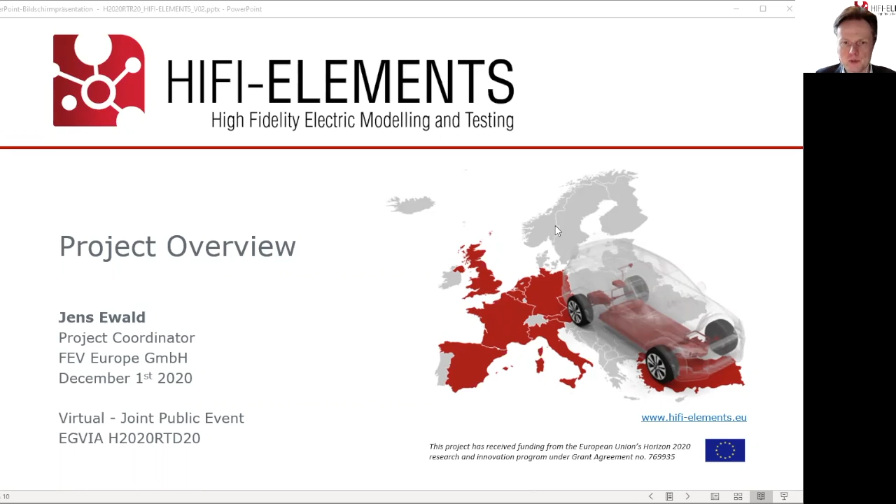So HiFi Elements is to improve the battery electric vehicle workflow with its results. It's an EU-funded project with 16 partners in the LC-GV-07 2017 call. It started in October 2017 and runs until the end of this year. So we have partners from all over across Europe. As you can see, we have engineering services providers. We have tier 1 suppliers.

We have research institutions from academia, as well as OEMs, mainly here Ford, Iveco, and Jeep, who are complementing our project here from the OEM side. Our work scope means that we want to develop effort-saving automation methods for calibration and testing and increase the test coverage for battery electric vehicles with our developments.

And main topic is the simulation of the whole battery electric vehicle, for which we are proposing a standard for the simulation system architecture. And when you subdivide this architecture into components, we also standardize what we understand under such a component, and we define the interfaces between the components. Those component models, according to the standard, are being also implemented and developed in HiFi Elements. And then also we have developed a toolchain for data management and co-simulation.

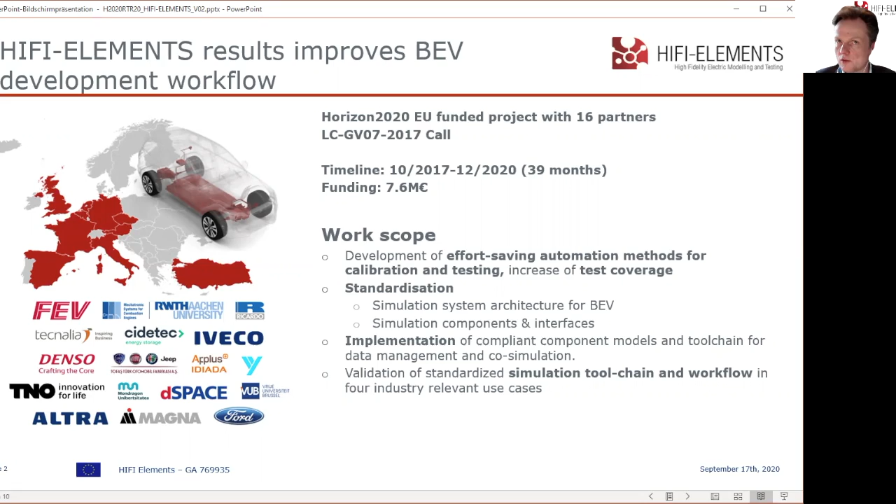At the end, then, we have validated the standardized simulation toolchain on the workflow using industrial relevant use cases. So this is the basic idea of where we stand from HiFi Elements. I showed this already last year on the EGVIA meeting, so just quickly going through this. We have several phases in the development project, going from a concept phase to detailing phase, and later to MiL, SiL, and hardware in the loop, and finally test bench.

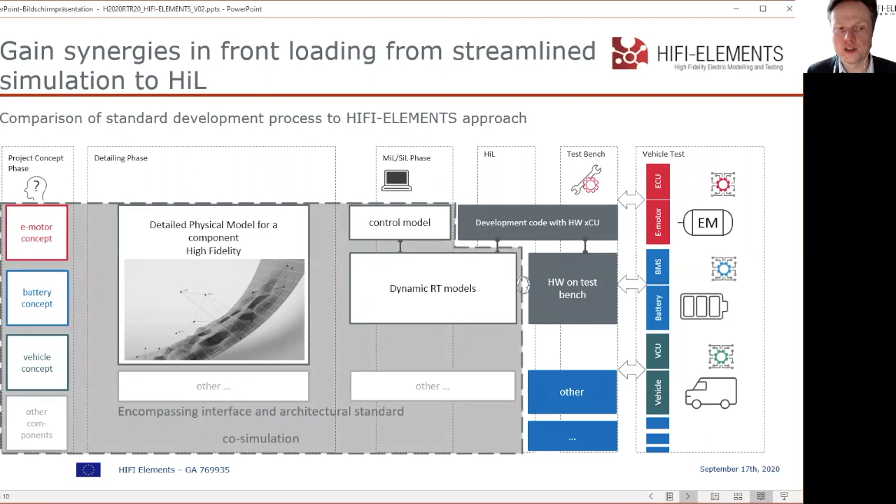And with the state-of-the-art workflow, we have discontinuities in which we cannot really further develop because we are missing an overall standard where simulation codes can be then exchanged, and that means that teams cannot really efficiently work together. So we have decided that we want to define this encompassing interface and architectural standard in order to overcome these problems. We are using public standards like FMU, FMI for this, and we are also using tools like co-simulation in order to do so.

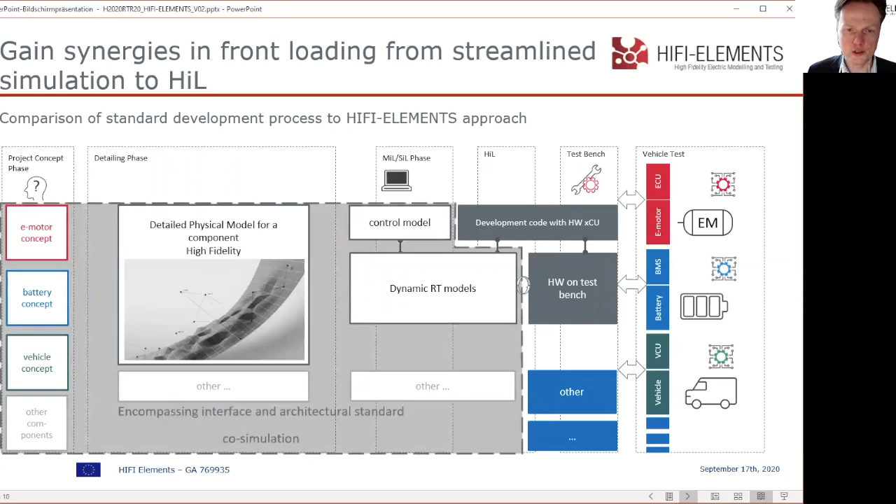So by means of this, we already have fulfilled our first objective by defining architectural simulation standards and its physical partition. So usually when you do such a BEV simulation or a MiL and HiL and use simulation tools, for example, each of the simulation tools, which might be commercial, like KULI, GT Drive, or whatever, they are looking at a specific physical discipline, either the thermal discipline like KULI, or the mechanical or electrical discipline. But that would be across the components.

So that means that the simulation tool would then, in the state-of-the-art approach, take care of many components at the same time. And one of the components is always represented by different simulation tools. Here in HiFi Elements, we want to improve exchangeability. And therefore, we have said we put together the component into one model and put also the controls to it. And that would cover all the physical disciplines, which means that we have to have co-simulation.

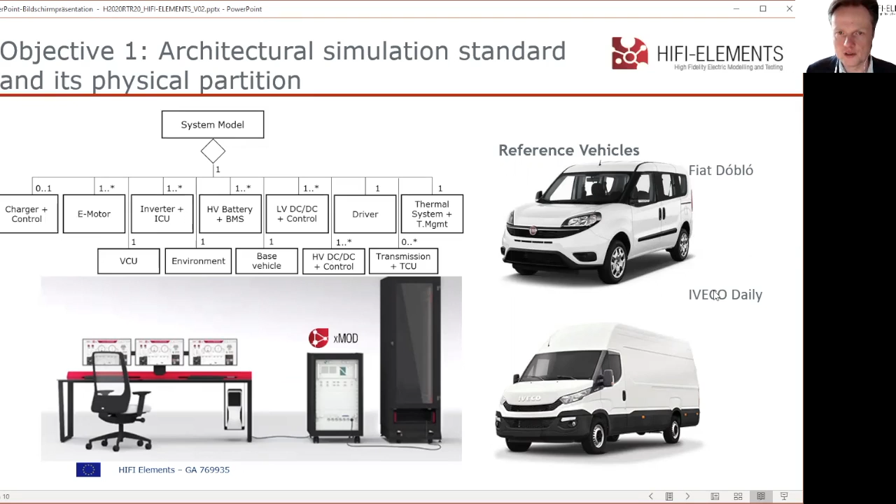For example, that a simulation tool like KULI has to exchange the information with some kind of FMU or MATLAB Simulink that takes care of the thermal system within the e-machine or the battery, etc. So here, the other two vehicles that we have taken care of. This is this van and this light duty transporter, the Fiat Doblo electric and the Iveco Daily electric.

Furthermore, we have then recommended standards, which is the electric modeling architecture. It has been publicly made available. It's a public proposal standard for the component model interface, and it was developed systematically using systems engineering-based methods. It supports, as I said before, co-simulation, X-in-the-loop test, and public standards in FMI, FMU. It covers a number of different vehicle architectures that you can see here.

Our simulation tool chain and data management performs the management, the validation, integration, and the simulation of component models. It also validates, once you put in, like in a shopping cart situation, the different component models, if these work together. It includes a tool for the automatic generation of test cases and oracles for simulation models. That means we can execute quite a number of tests automatically by means of a domain-specific language, which then formulates the requirements to fulfill these tests.

We also are able to calibrate model parameters against a certain physical behavior. So for example, you have a component and you have a model which needs to be parameterized to mimic this behavior of the physical component.

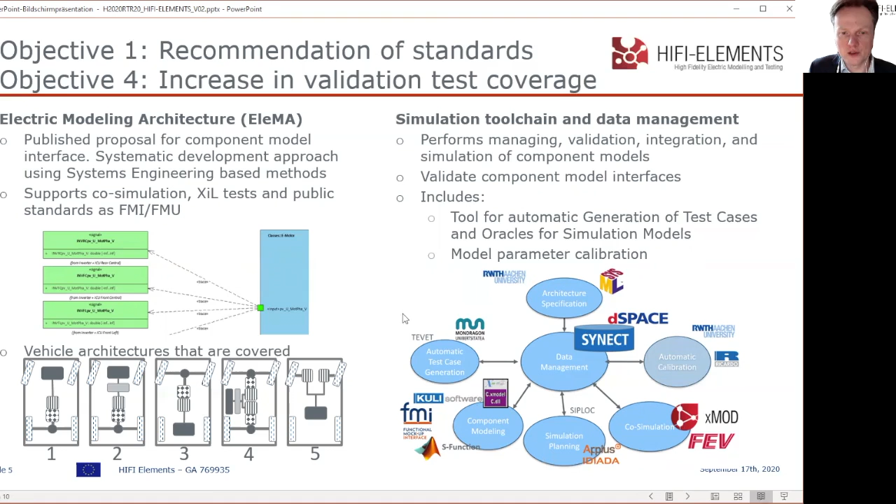Our simulation toolchain also can do so. We're using tools here like XMod from FEV, dSPACE SYNECT. We're using SysML. We support, as I said, FMI, FMU. KULI was used. We can use it with C codes. MATLAB Simulink can be used. And so this basically is our tool chain.

In another objective, we have looked at this from the modeling perspective. So we have developed lots of component models, and at the end, we have shown in use cases, for example, this e-motor use case, that we can execute a MiL-to-HiL use case in order to run this in a test bench in a transient way as it was in the simulated vehicle.

So the e-machine and the inverter of the e-machine are physically represented, and otherwise everything else on this test bench is just a virtual vehicle represented by a battery emulator, by a dyno, which simulates the resistance, and everything else, the whole vehicle and the other components, are all included in a vehicle simulator, so on the MiL. And we have evaluated this also to see how we can optimize our workflow using these results. I will show this later.

The second objective for this MiL to HiL was battery-in-the-loop testing. It shows you the testing of a battery in early stages of the development in a controlled environment with high repeatability. Also here the battery HiL was formulated, and it was then coupled with a realistic vehicle model using a HiL and the co-simulation.

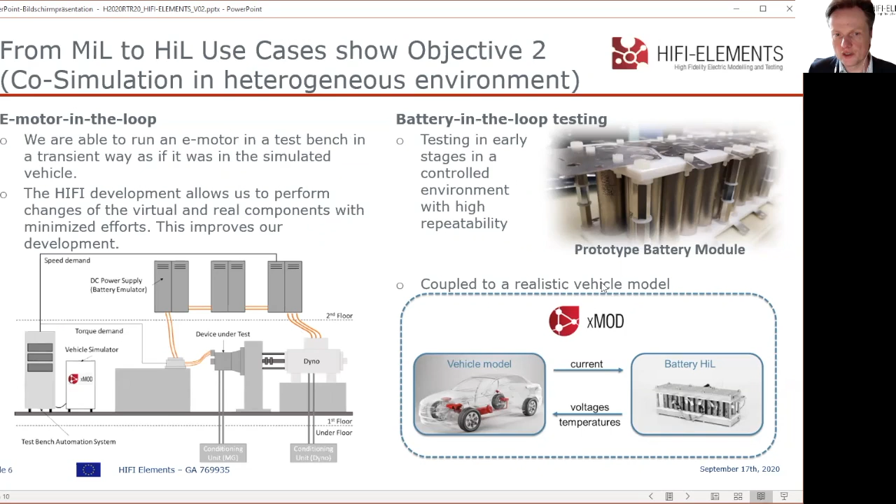And the other objective was to look at exemplary reduction of energy consumption by concept simulation. So this is just an exemplary result of what we found out. It's maybe not transferable to the real world in all cases, so it could be different. We have seen that we can, by means of our simulation, define an optimal hardware architecture, or also speed advice optimization, something which goes in the topic of controls, by up to 18%.

So up to 8% energy consumption can be reduced by just reducing the hardware demand. So we can look at different hardware components much easier, do the simulation in the concept phase and find the optimal way. And since we have the HiFi-ELEMENTS development, we can do so much more and much easier.

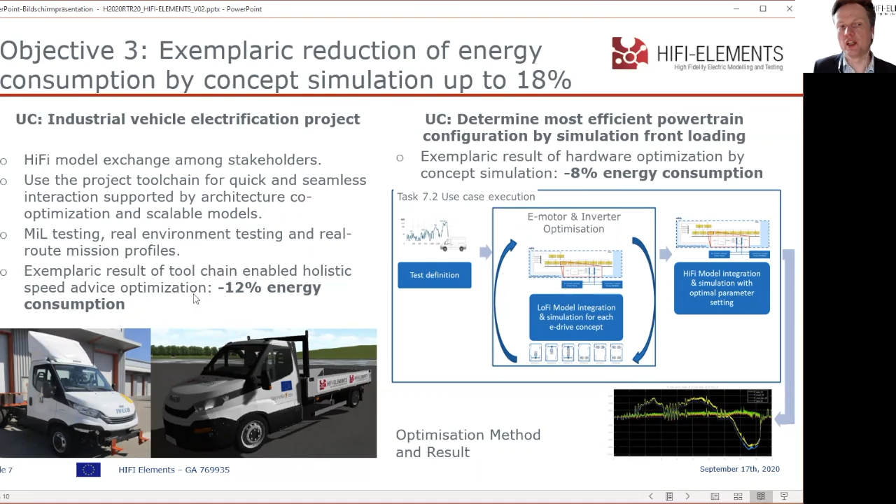So look at different candidates of components and then fine-tune the whole setup of the battery electric vehicle much better, so that we can come up to a reduction in energy consumption just by means of this, and also by the way that we are able to perform a tool chain enabled holistic speed advice optimization. We gain another energy consumption reduction of 12%, so that we can nearly reach this objective here.

If we look at the reduction of powertrain development efforts in total, from the concept to the controls, we see that by using all the different ways, we can save up to 60 to 70% in efforts. And I think this is a great achievement.

The main topic comes from the fact that we have a standardized interface, so we can reuse component models without any major efforts. So from previous projects, they could be taken over. We can also exchange component models with different suppliers if they stick to this standard, and then they can be easily used in our simulation environment almost plug and play. We are able to execute more tests, because all the tests that we want to define are defined by this testing language and then automatically generated.

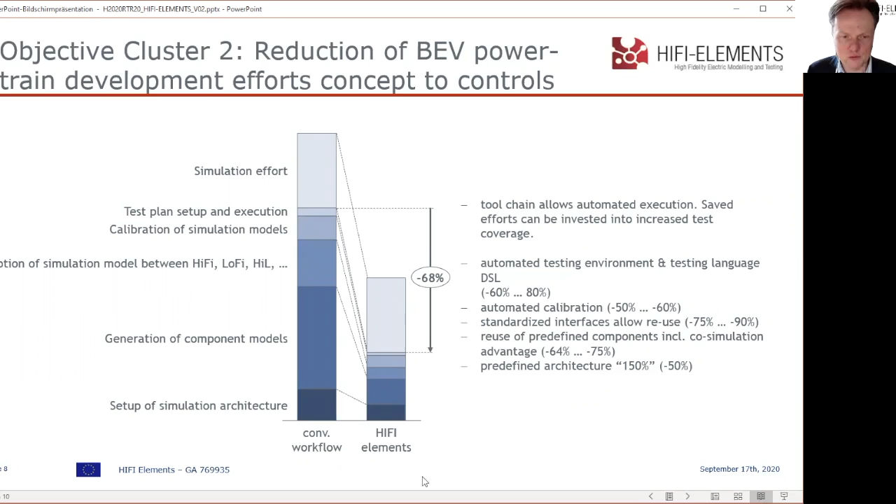And what I would like to give you away with this presentation here: HiFi-ELEMENTS achievements are the recommendation of standards, the reduction of development and testing efforts by more than 50%, as you saw, so it was even higher than that. We have almost achieved our objective of decreasing vehicle energy consumption by up to 18%. And we are able to increase the test coverage with our simulation tools up to tenfold, actually.

The outlook I see beyond HiFi-ELEMENTS is that other research projects already now consider and plan to use the results of HiFi-ELEMENTS, for example, CEVOLVER and SELFIE. Nevertheless, what should be done beyond HiFi-ELEMENTS is that this proposed standard should be maintained beyond the end of this project. And of course, the more people work on this, the more hands-on experience with the standards that have been developed, it would definitely improve the set of functional requirements for component model development, and it could then be spread further towards the community.

And of course, we have looked at battery electric vehicles only, but the outlook could also be to include further technology packages like fuel cell and hybrid.